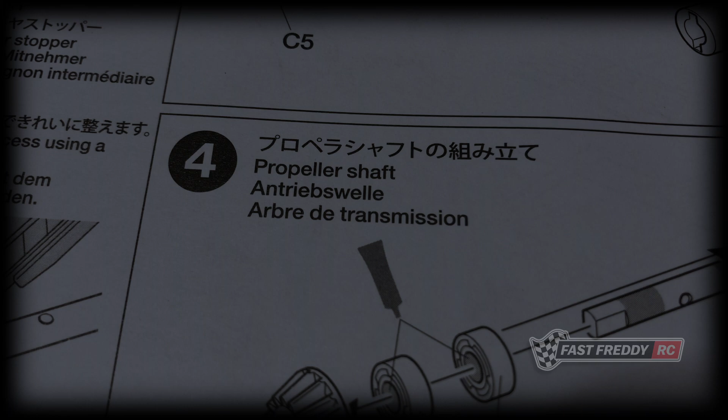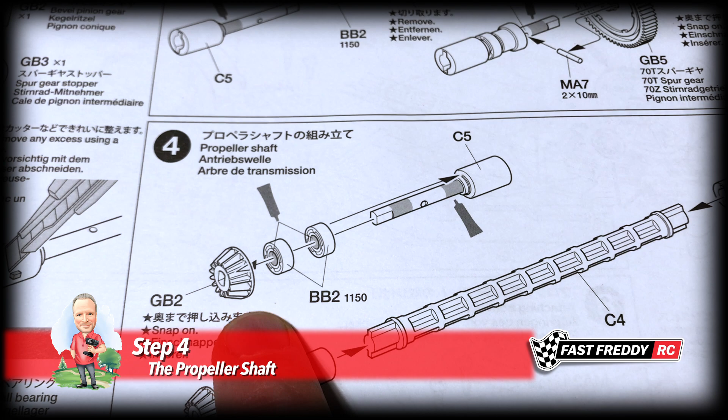So for step 4, the propeller shaft, you can see that we're going to grab our other propeller joint and then put in a couple of bearings and the GB2 bevel pinion gear. And then we have to connect both that and what we did in step 3 to the propeller shaft. And again, we're replacing all that with the hop-up item, which is the propeller shaft itself, which is awesome.

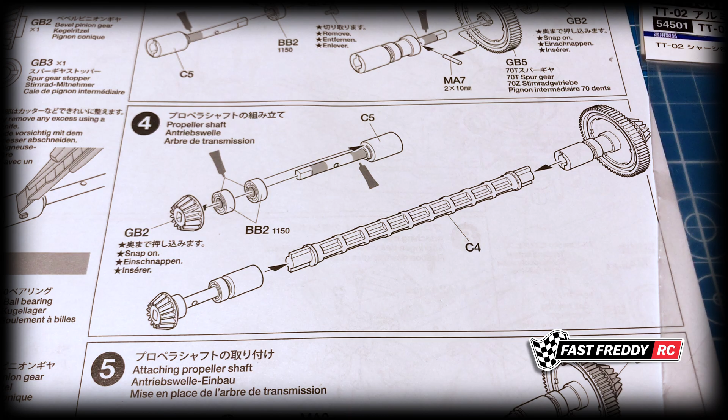And then, of course, we've got the other propeller joint that's the aluminum hop-up as well. And, of course, there's our bearings and the gear. So I'll set this up and let's put this together. So first off, let's grab the other propeller joint, which here we go. And then we've got 2 bearings.

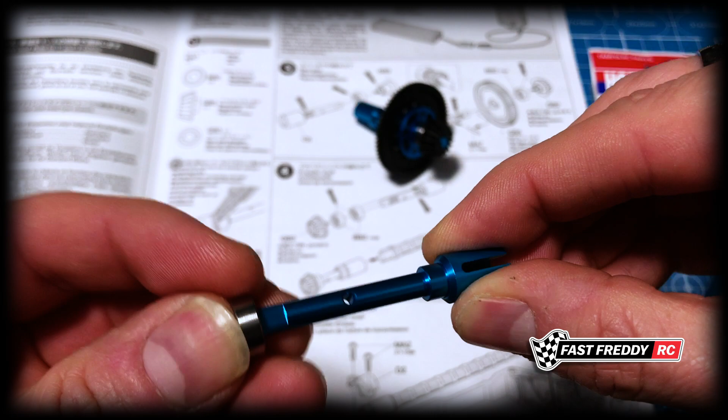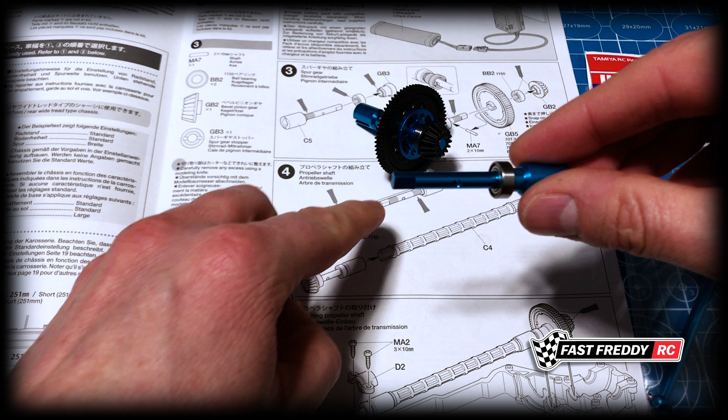And I am not greasing this up. I typically with ball bearings don't do that. If this was the plastic bushings, I would. With the ball bearings, I'm not going to. And then you can see that the other one is going to sit there. And then that gear is going to sit just like that. And when you push it, you can actually feel it kind of pop into place a bit. But ultimately, that is what it's going to look like.

So if I put that aside for a second, you'll notice that the propeller joints actually came with an O-ring. And I'm going to stick it in at this point because it's designed so that the shaft itself doesn't have too much play, because it's going to move inside, and you'll see later on how that's going to be. But for now, I'm going to stick this into here. And the easiest way to actually get it down is to grab our propeller shaft now. We can open this.

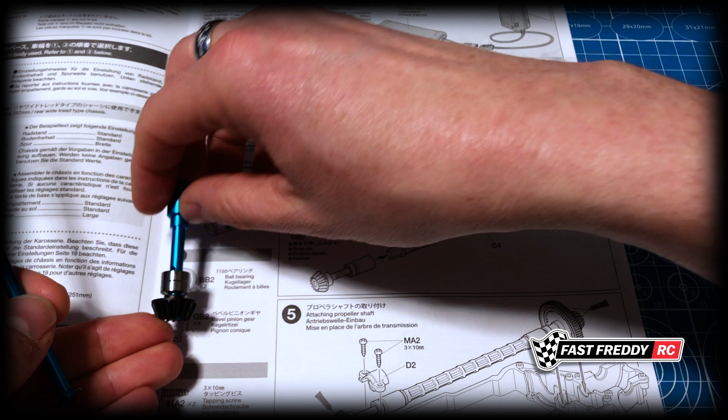And I'm going to take the shaft and make sure that that O-ring is going in there properly. There we go. So I'm just going to grab that and push. You can see it going down and it'll be nicely in the right spot. So that's going to provide a bit of cushioning, because otherwise this is going to move and there'll be a lot of flop. You don't want that, which is why we're going to put the O-ring there.

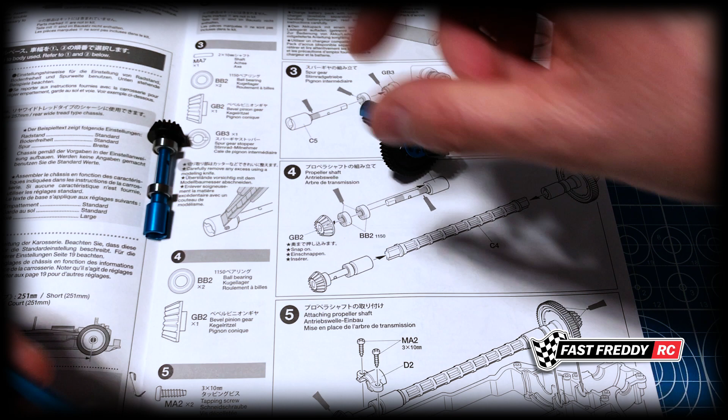And I might even put an O-ring on the other side, even though the joints didn't come with one. I have a spare, which I might use so that we don't have as much slop. So if we look at this again, we're replacing the big plastic one with our aluminum propeller joint, and honestly, it's as simple as that. That is what step 4 looks like after you've put all the pieces together. So fairly simple, and I really like the blue anyway. That's pretty cool. So that is step 4.

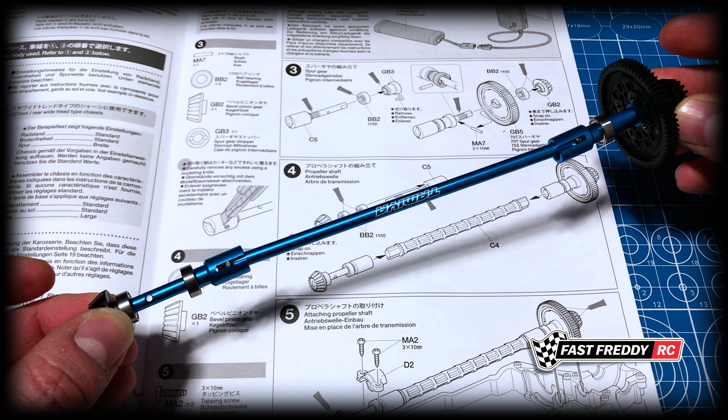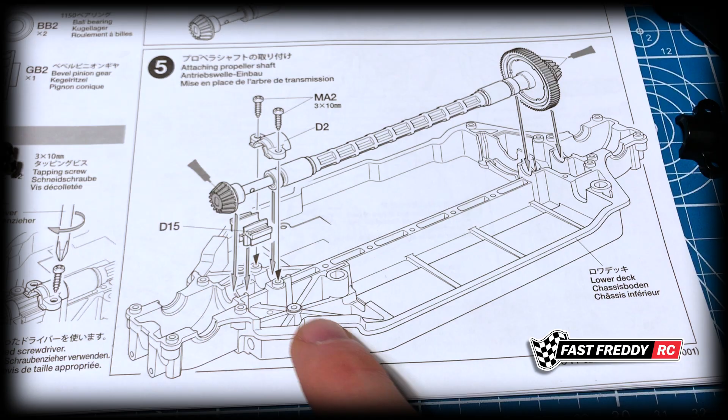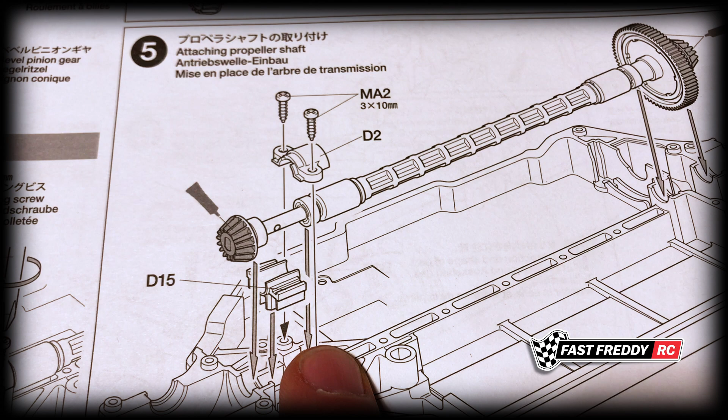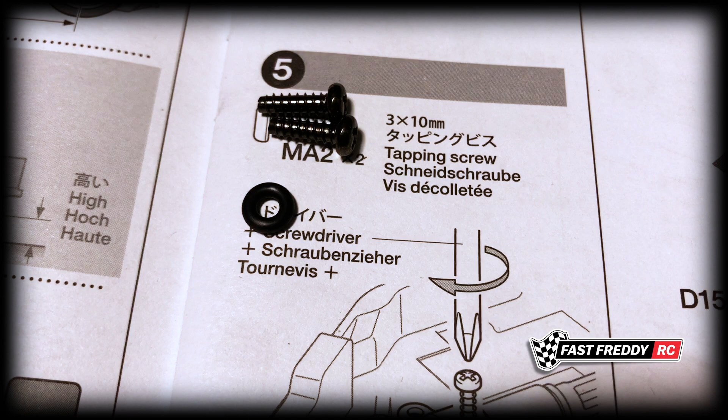So for step 5, attaching the propeller shaft. In this step, we're going to put everything in steps 3 and 4 into the chassis, which I have right there. And then there's these 2 pieces right here. One goes below and one goes above, which is going to hold the whole drivetrain in place on this side. And there are the 2 screws that we need. Now there is the spare O-ring that I was talking about, which I believe I'm going to end up putting into the other side. But let's put it into the chassis first, and then we can see if there's any slop with the drivetrain.

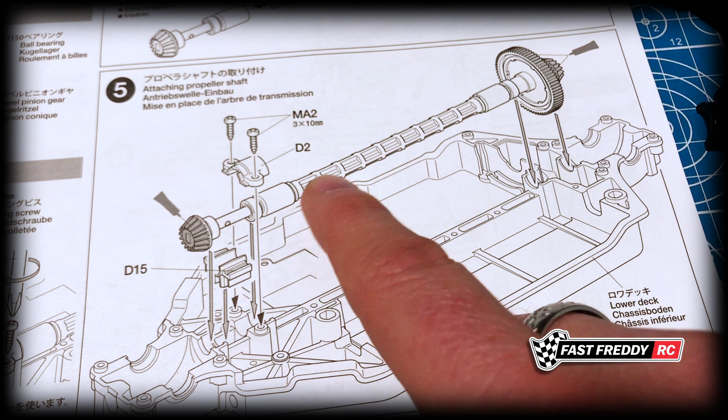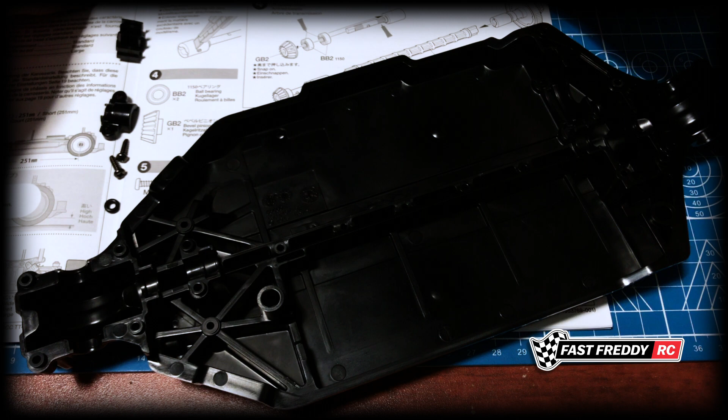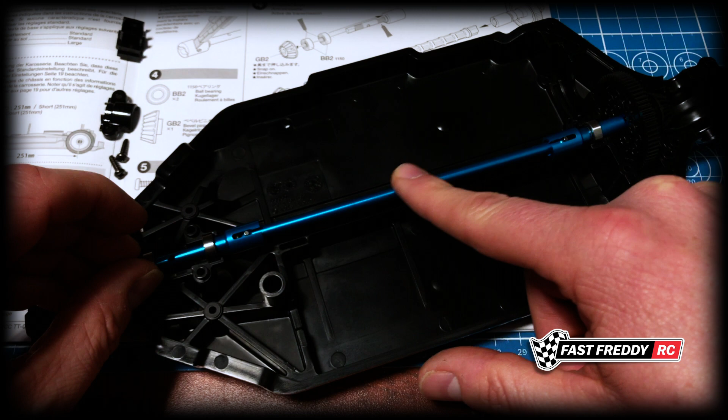So let's grab the chassis first, and you can see that the spur gear is sitting at the back because that's the motor mounting area. So there is our chassis. So if we grab our propeller joint, spur gear, and propeller shaft itself, we're going to slip that into the back, slip that into the front, just like that. So it is in place. Now, as I said before, I wanted to see how much slop there was going to be. Notice that the drive shaft can move back and forth. I'm not saying it's bad, but we don't want too much movement in there.

So I think I'm going to put an O-ring into this side as well now. So if I put that in place, let's make sure that that's going to sit correctly. I will use the propeller shaft to push down on it, get it into place. There we go. It's pretty much at the end, as you can see. So again, let's put this back, where we'll sit one side there and one side in there.

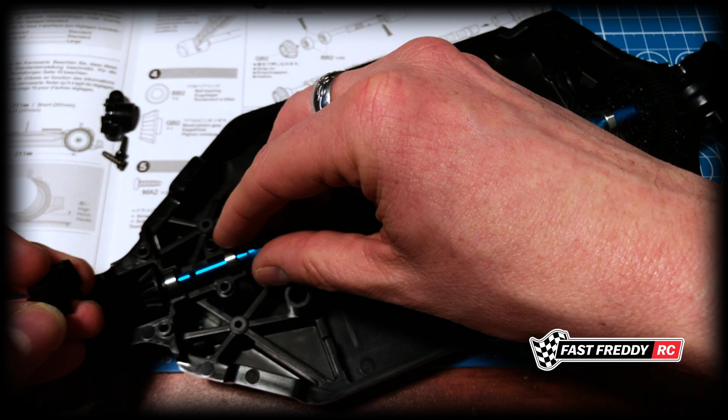So there's a bit of movement, but not too much now. So there's not going to be too much play, and it won't be that much slop either. So that's great. So I'm happy with that. So now all we're going to have to do is put this piece down, which is sitting like that. In fact, that's got to be pulled up, put that down, put that back on.

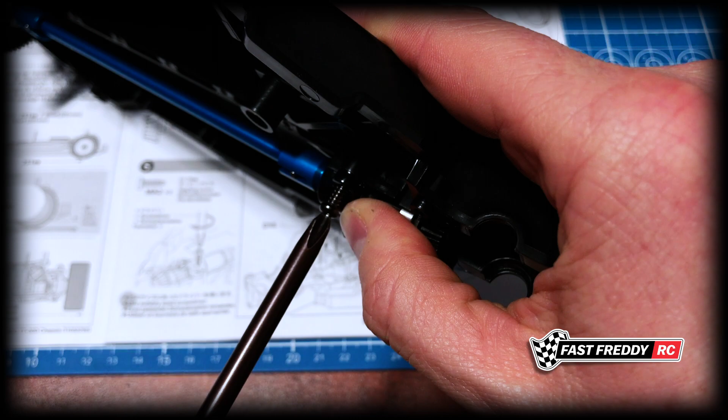And then this piece here is going to sit just like that over top of this, but also over top of the bearing. So you can see, if we take that off again, how that looks. This is going to sit just like that. And then we can screw this down. So if we take one of the screws, and these are the tapping screws. I'm just going to get it started, and the same thing with the other side. Make sure that that is feeling right, which it is.

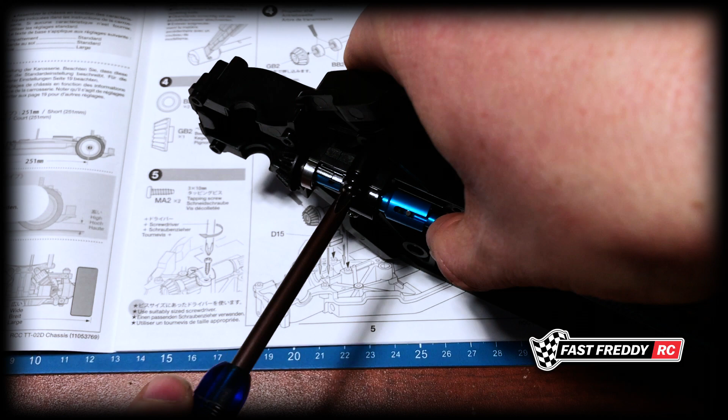Whoops, I forgot that that side's not attached. So let's just slide that back in again. And we'll do it this way. I'll hold the drive shaft that way because it's easier to screw it in if you've got some leverage, because I've got my other hand holding the back. There we go. So that's nicely in place. So ultimately, step 5, you should have it looking like that.

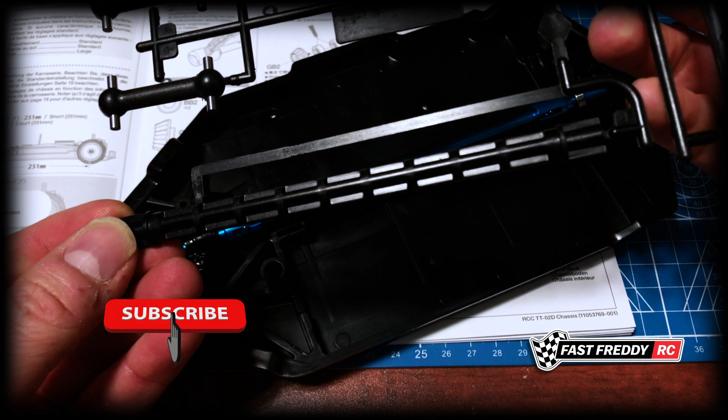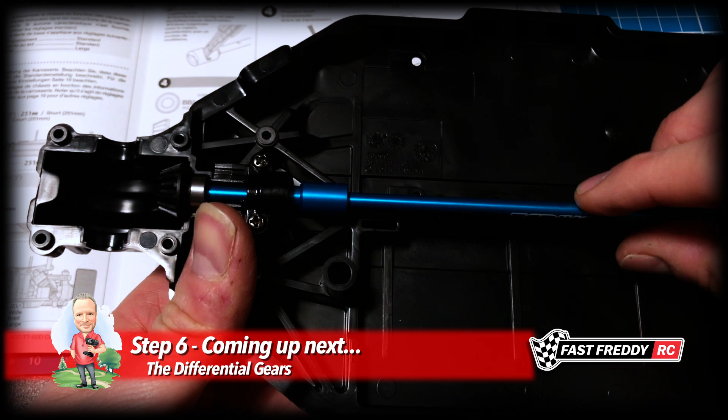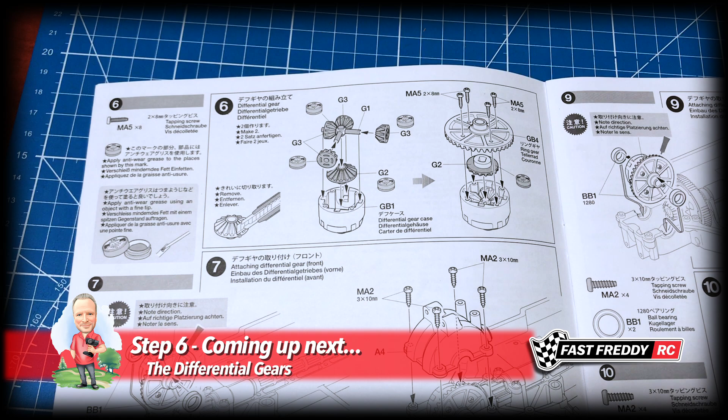Now, what's nice about replacing all of the plastic parts with these aluminum pieces is, look at how bulky the original drive shaft is. It's just a plastic thing, which probably isn't even that well balanced. And of course, there's the joints that we would use if we were using the standard shaft that comes in the kit. But this, to me, is going to be a lot smoother, a lot more balanced, and it just feels really nice. So that's it for step 5. So we can now move on to step 6 and put together the differential gear.